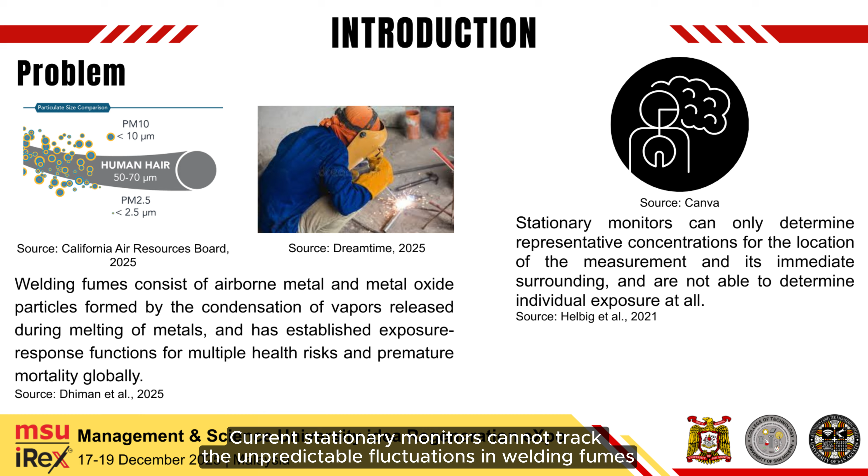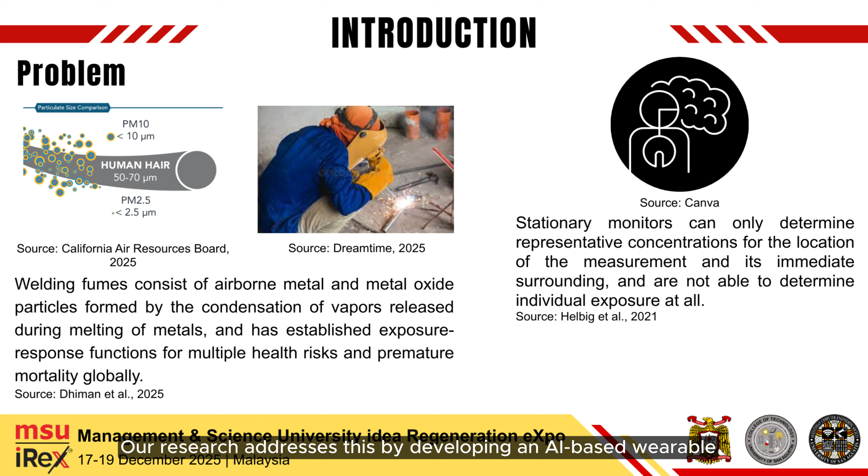Current stationary monitors cannot track the unpredictable fluctuations in welding fumes. This creates a blind spot for worker safety. Our research addresses this by developing an AI-based wearable. This system uses real-time data to transition from general room monitoring to personalized immediate hazard detection.

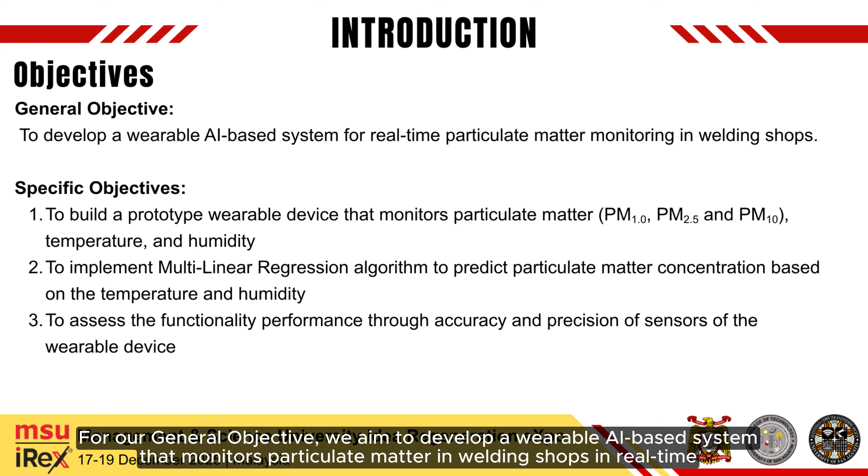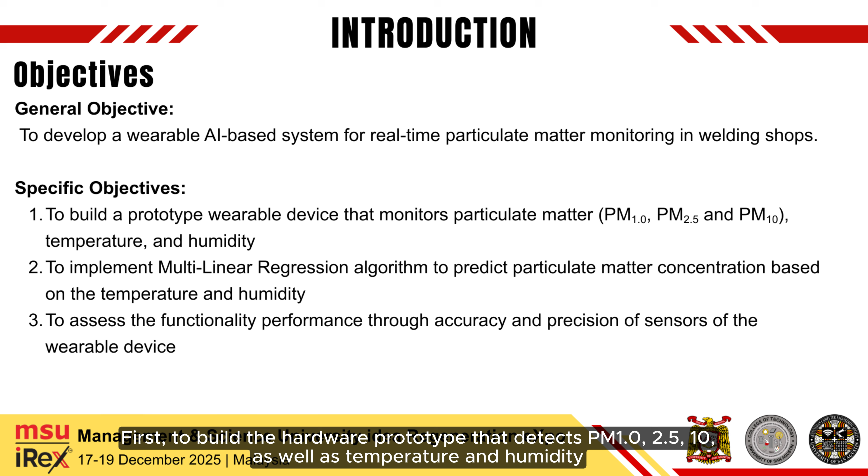For our general objective, we aim to develop a wearable AI-based system that monitors particulate matter in welding shops in real time. To achieve this, we have three specific objectives. First, to build the hardware prototype that detects PM1, 2.5, 10, as well as temperature and humidity.

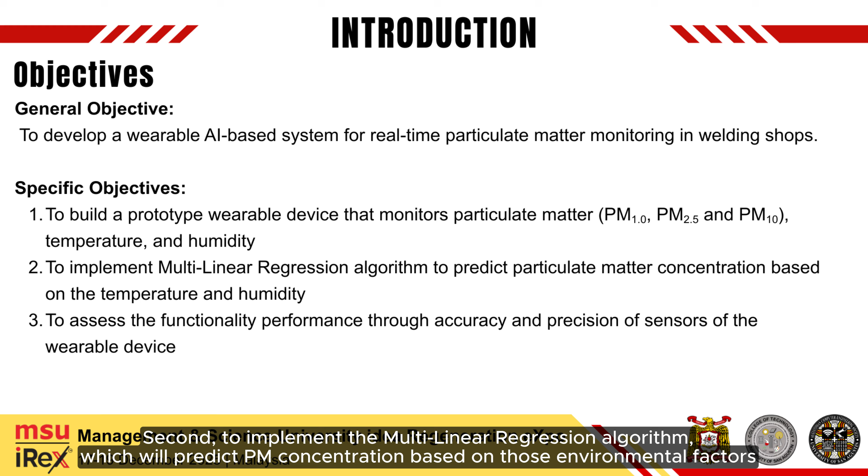Second, to implement the multilinear regression algorithm which will predict PM concentration based on those environmental factors. And finally, to assess the device's performance by testing the accuracy and precision of its sensors.

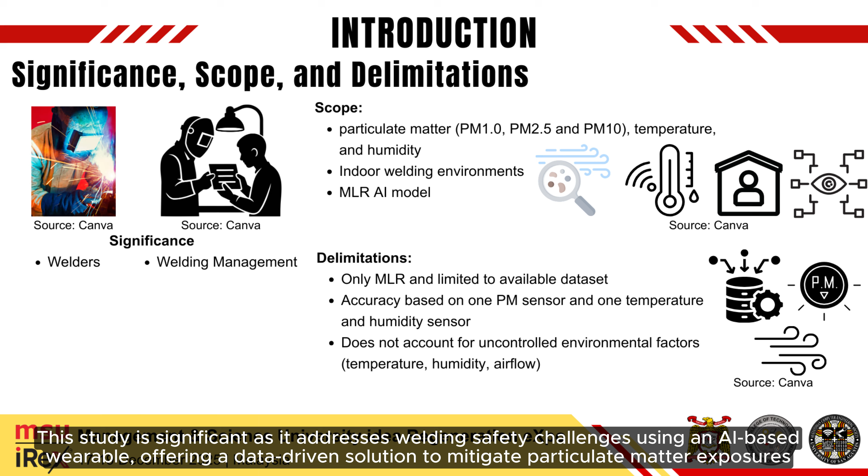This study is significant as it addresses welding safety challenges using an AI-based wearable, offering a data-driven solution to mitigate particulate matter exposures. For the welders, it's a personal alarm system for immediate risk. For management, it's a tool to keep an eye on their team's working condition.

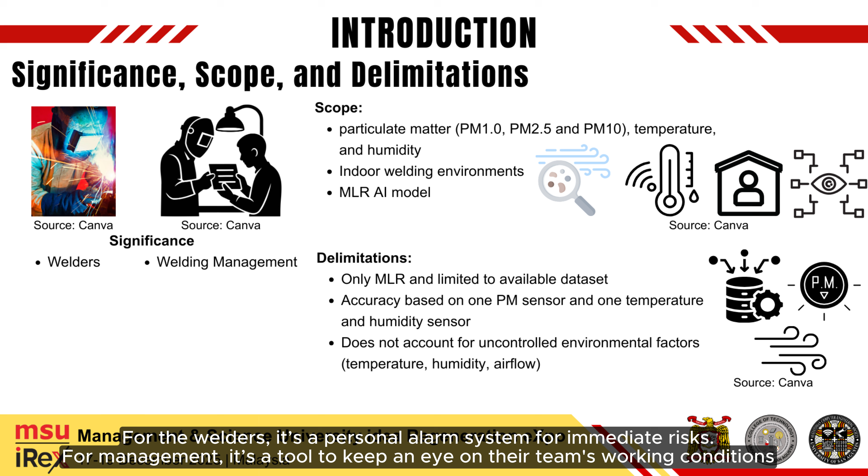For the scope, our study focuses strictly on indoor welding environments. The device will monitor three specific particulate matter sizes, PM1, 2.5, and 10, along with temperature and humidity, utilizing a multilinear regression model. For the delimitation, we are limiting the AI aspect to the MLR algorithm based on our available dataset.

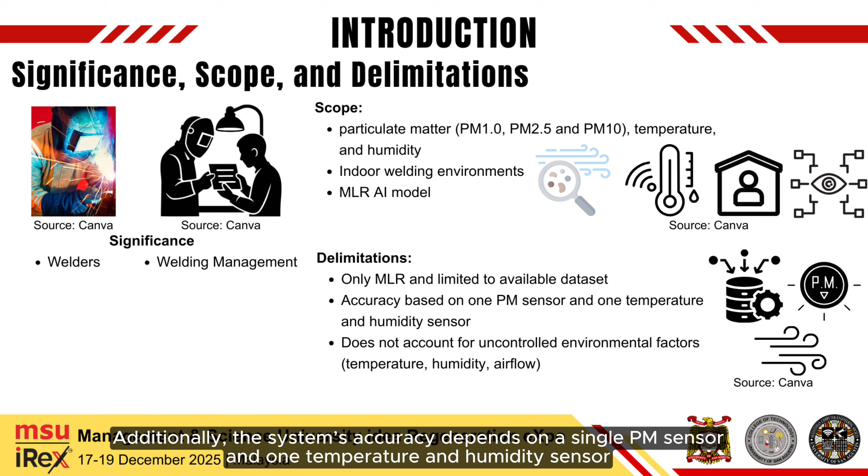Additionally, the system's accuracy depends on a single PM sensor and one temperature and humidity sensor. And the study does not account for uncontrolled environmental factors, such as changes in airflow or external weather conditions.

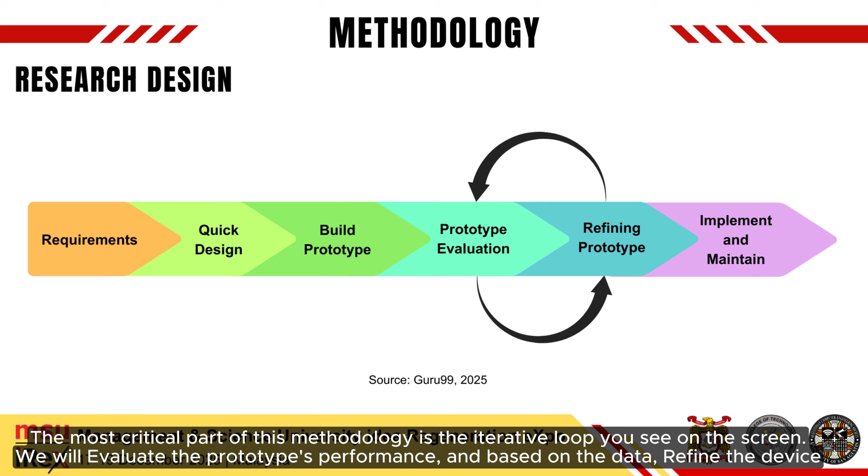For our research design, we have adopted the prototyping model. The process begins with gathering requirements and creating a quick design. From there, we build the initial prototype. The most critical part of this methodology is the iterative loop you can see here on the screen. We will evaluate the prototype's performance and based on the data, refine the device. We will repeat this cycle until accuracy is achieved, leading to the final implementation and maintenance phase.

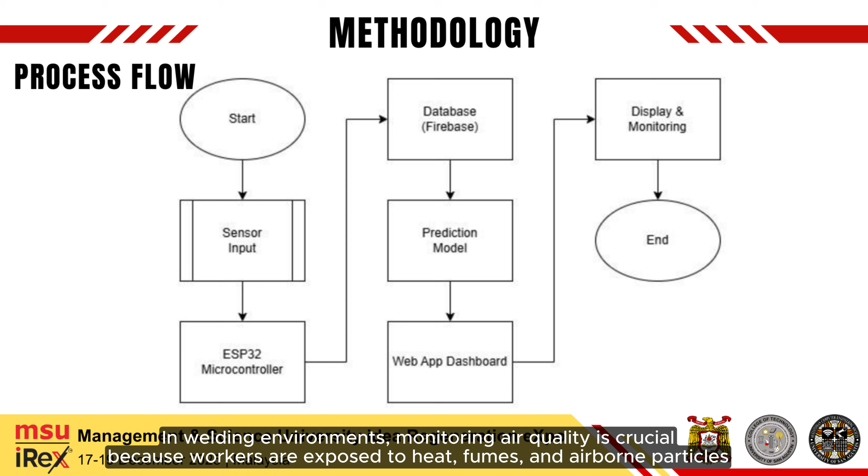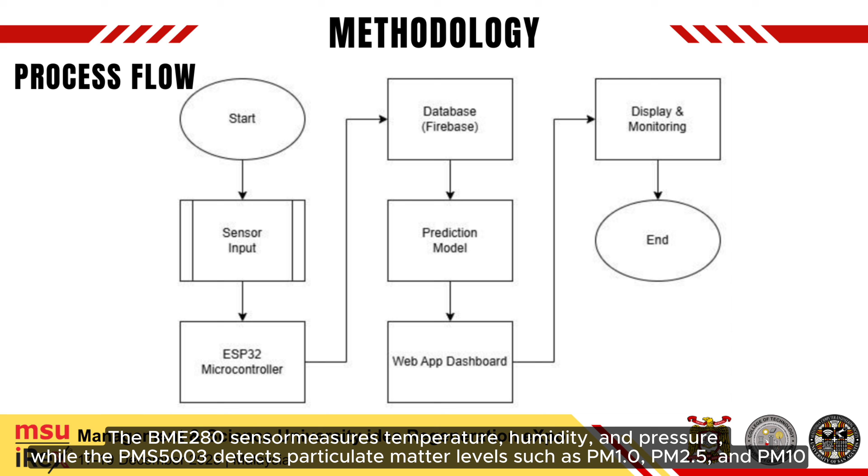In welding environments, monitoring air quality is crucial because workers are exposed to heat, fumes, and airborne particles. Our system continuously tracks these conditions in real time. The BME280 sensor measures temperature, humidity, and pressure, while the PMS5003 detects particulate matter levels such as PM1, PM2.5, and PM10. All data is sent to the ESP32 microcontroller, where initial filtering and calibration ensures accurate readings.

The ESP32 then uploads the processed data to Firebase. A Python backend retrieves this information and performs linear regression to predict PM trends and identify potential air quality risks. This allows early detection of unsafe conditions, improving safety in welding operations.

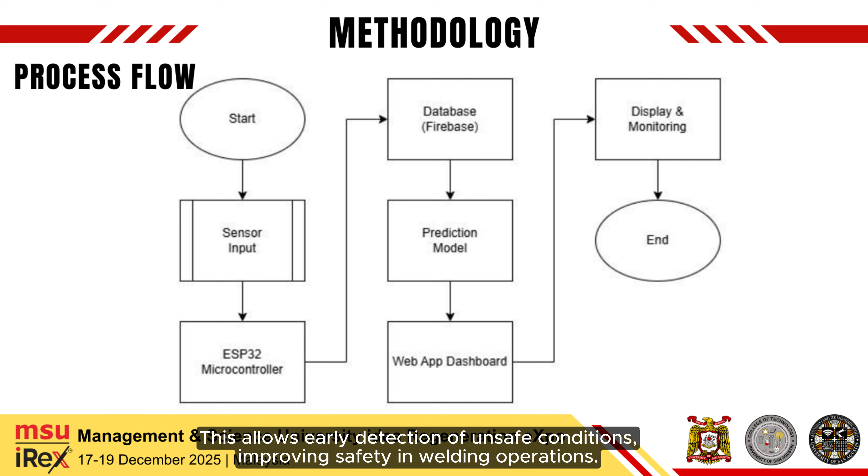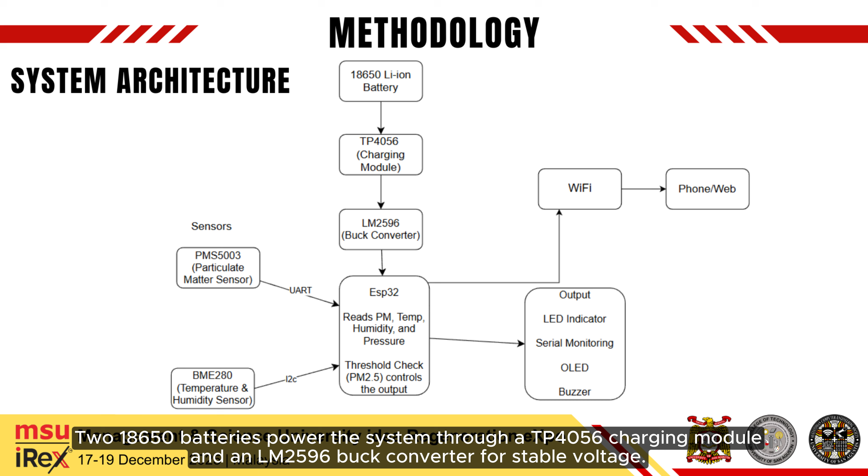For the system architecture, the ESP32 serves as the system's core, sending outputs to an OLED display, LED indicators, and a buzzer for warnings. The PMS5003 and the BME280 provide the air quality measurements. 18650 lithium-ion batteries power the system through a TP4056 charging module and an LM2596 buck converter for stable voltage.

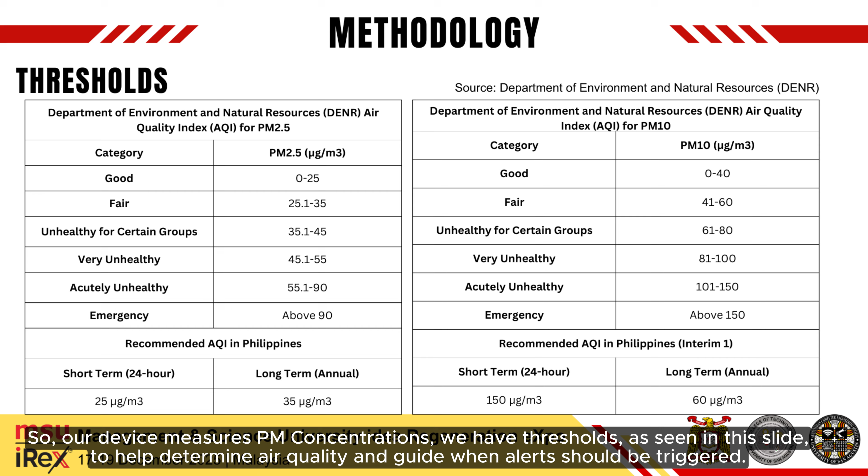All sensor data is transmitted via Wi-Fi to the database, where it can be viewed on a website for continuous monitoring and analysis. Since our device measures PM concentrations, we have thresholds as seen in this slide to help determine air quality and guide when the alert should be triggered.

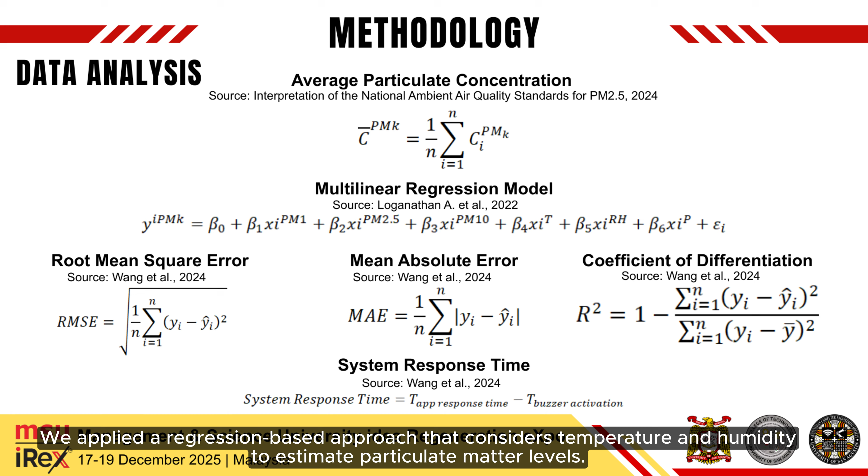We applied a regression-based approach that considers temperature and humidity to estimate particulate matter levels. This helps us understand how environmental factors influence PM behavior. All measurements are displayed in a web app that shows real-time readings and trends. This ensures that users can easily monitor air quality at any moment.

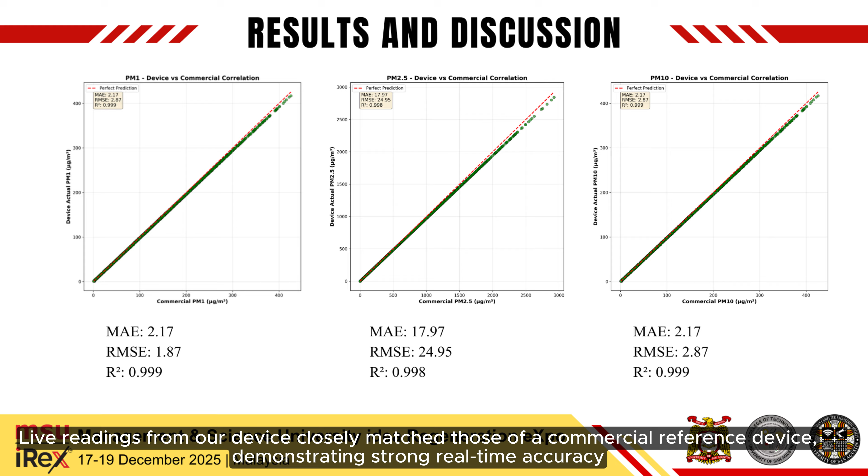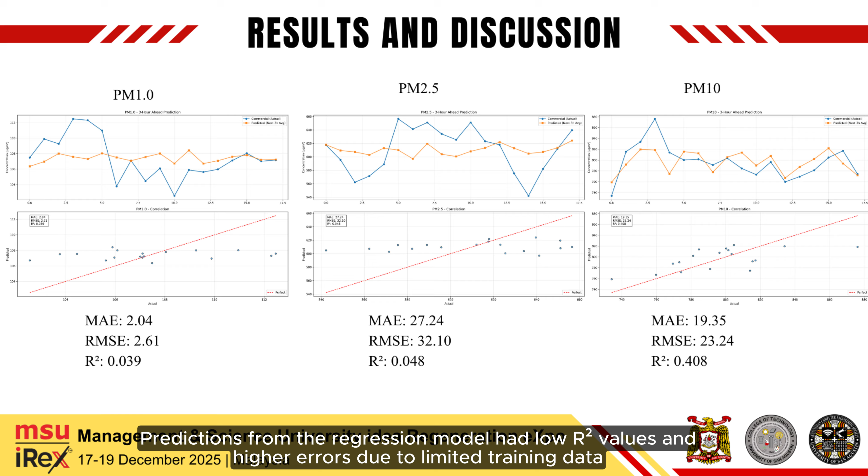Live readings from our device closely match those of a commercial reference device, demonstrating strong real-time accuracy. Predictions from the regression model had low coefficient of determination values and higher errors due to limited training data, but they still captured general PM trends and the impact of environmental conditions.

In conclusion, the device achieved strong real-time accuracy against commercial standards. Although the multilinear regression model showed weak performance for PM1 and PM2.5, and only moderate accuracy for PM10, the wearable device successfully captured breathing zone exposure that stationary monitors often miss.

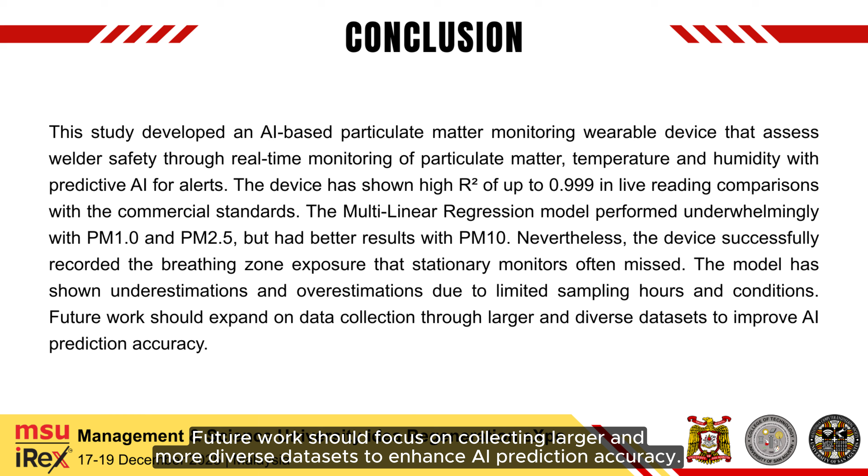The prediction errors were largely due to limited sampling hours and environmental variability. Future work should focus on collecting larger and more diverse datasets to enhance AI prediction accuracy.